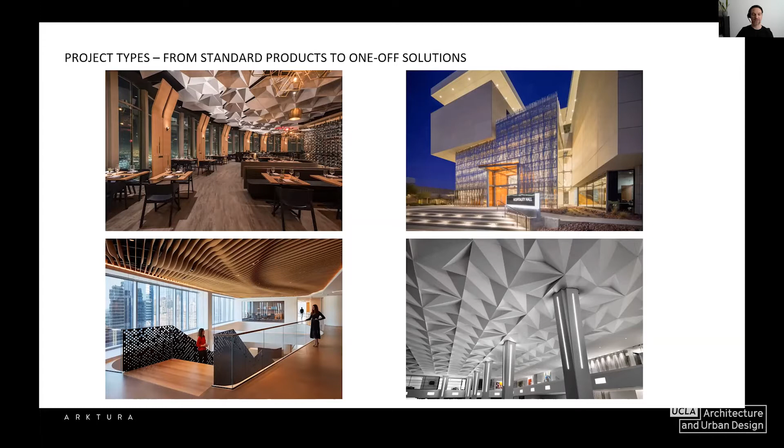So the way we approach designing and manufacturing is really as we think of ourselves as not just fabricators, but actually collaborators. So what we want to do is get involved with an architect, even at the earliest stages of what they envision for a project, and bring it as close to a manufacturable product with our manufacturing knowledge and capabilities as soon as possible. So we're really trying to engage at this design concept stage and collaborate all the way through the creative process,

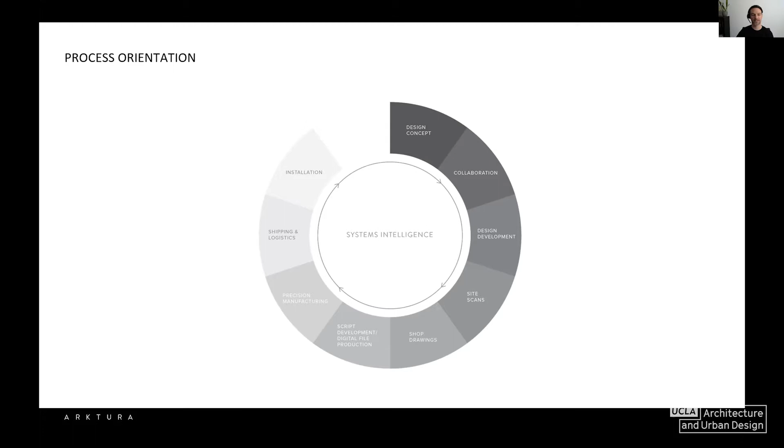through developing what's happening in a job site, software we might need to write, and all the way through to manufacturing and installation, and being involved all the way through a process, and not just providing product at the tail end of a project. And so we kind of live by this model of collaboration. So we're the manufacturer. We're also the designer sometimes, depending on what kind of project we're working on, and really engaging with all of the stakeholders on a project so that we're bringing the maximum amount of manufacturing intelligence and design and automation to the table.

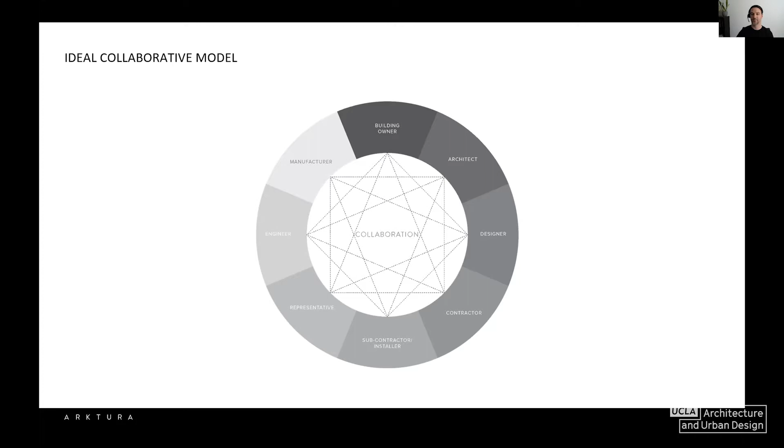And the way that we're doing that, we use this conceptually, our approach of the physical toolbox and the digital toolbox that we can call on. We use manufacturing automation of CNC and laser, robotics, and as well as software-based automation. So a lot of parametric software that architects are used to using, like Grasshopper, as well as a lot of custom software that we'll write for manufacturing automation.

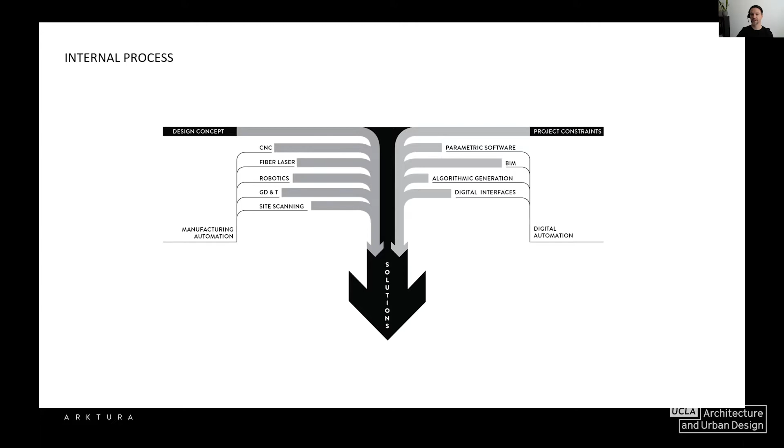So as an example, this is sort of a typical Grasshopper script that we would write. Some of you may be familiar with this, and for a lot of you, this will be something new, but this is how we're able to tell 3D modeling software to make automated pieces and parts for some of the products that we make.

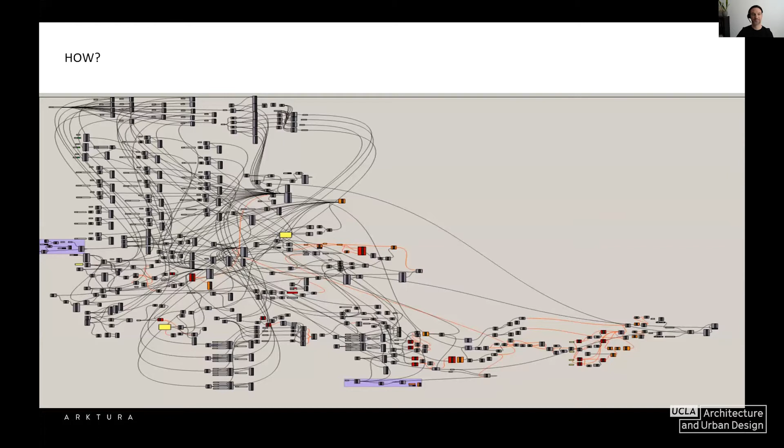And so I think the best way to understand our process is looking at our two major ways that Arktura operates in. We have a kit of parts model, which we call our architectural systems. And then we have the fully custom, sky's the limit design studio, which we call our Solutions Studio. And depending on which one of those paths we choose is how we approach the project.

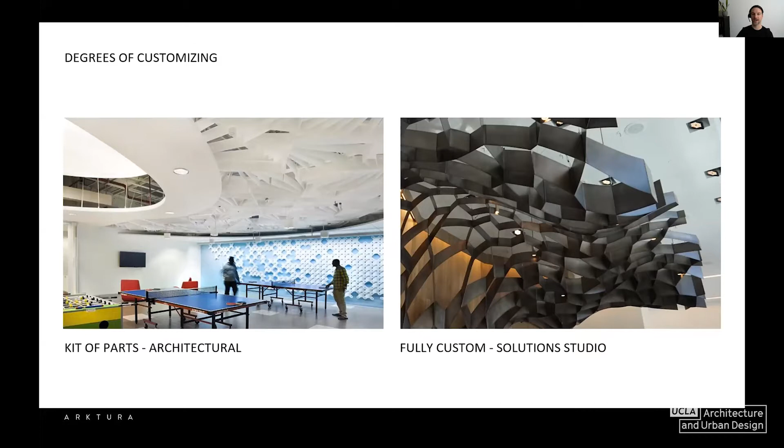So for example, in this kit of parts, what we're really trying to get to is something that's very adaptable. And by designing a kit of parts, we're able to apply it to many different spaces and keep costs down, and really help develop something that is flexible and can be applied to many different types of architecture, and allow for unique solutions without having to start from scratch every time. So really designing flexibility using parametric software and smart design of parts.

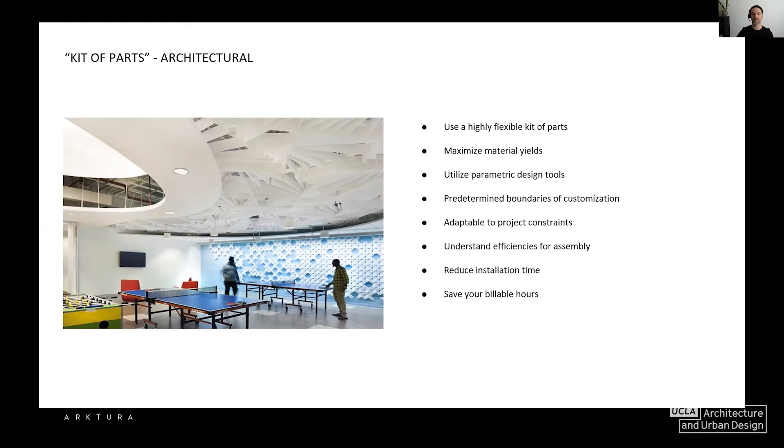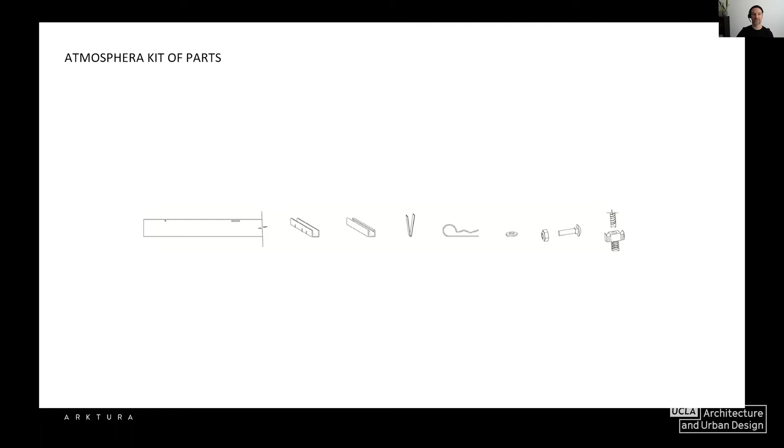So here, for example, there's this Atmosphera ceiling. It's a kind of a waveform, and you'll see some others here, but they all rely on the same base components. And then the software that we've designed allows us to make unique versions of each. So for example, there's a simple single fin, some channels, and a few pieces of hardware that is really all that goes into a system like this, but you get very elaborate outcomes by using algorithms and software that we've written to vary each component slightly, and then leveraging our digital manufacturing tools to fabricate each piece uniquely.

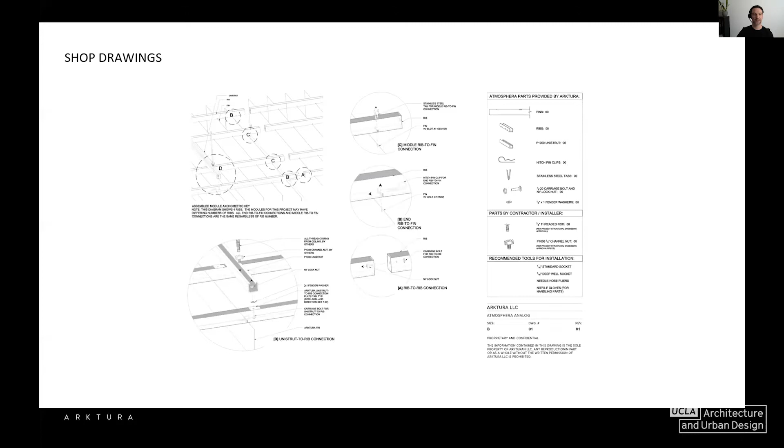So here you can see it's a very simple kit of parts. It's a couple ribs and some fins that cross it and some very simple hardware to attach them together. And by keeping this system really simple and allowing the software to create the variation and allow us to customize things, we're able to make really dynamic, unique installations for each project that don't cost a lot, don't take a lot of time to design, and are very unique and designed to each project to be a bespoke solution.

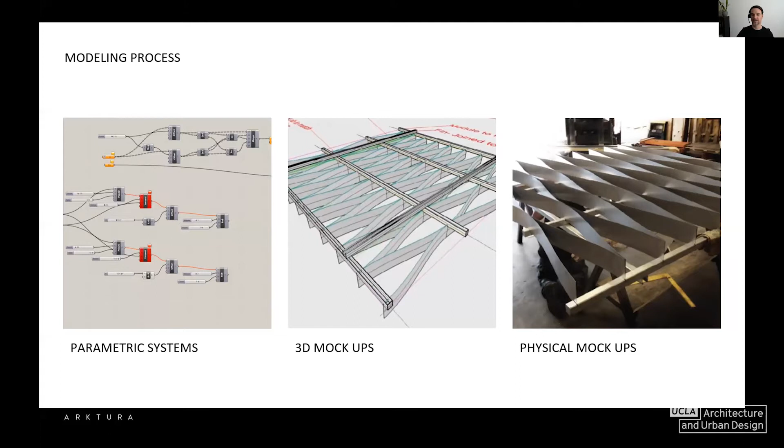So again, more of this parametric software that allows us to design in 3D and evaluate different designs and solutions, and then also manufacture and review physical mock-ups of each version that we fabricate. So for example, in plan view, if this is a very simple version of that Atmosphera system with very simple basic inputs, you can manipulate the forms to make them curve as a design choice. You can also accommodate pretty common architectural challenges like avoiding a column or integrating lighting and systems into essentially the same system with very few additional inputs, and still leveraging the same manufacturing techniques.

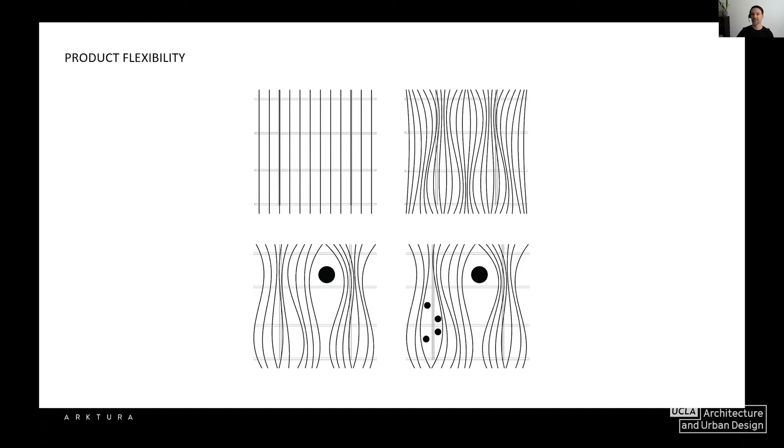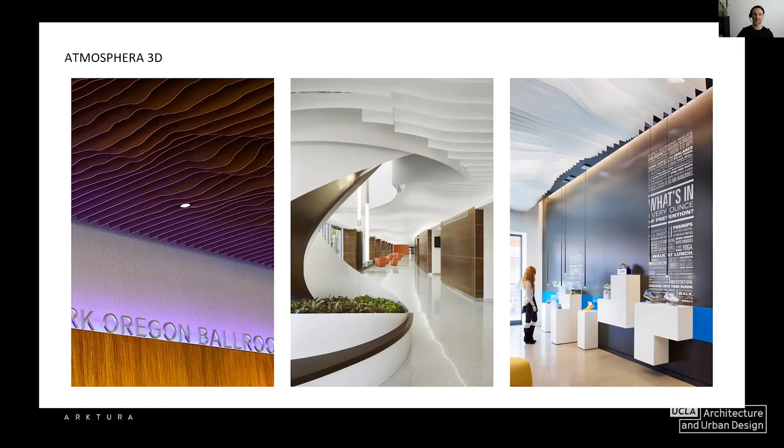So for example, these are 3 different versions of the same system. This was the Oregon Ballroom up in Oregon that we just completed. It's actually made with a PET felted plastic fin, what we call a soft sound. And each profile is unique, and the sum total of these make a topographical map. Here's another version that snakes through this lobby and this hallway and also undulates across to make a surface, and then a similar one that curves both in plan and also in section. And so with just that base system, we can create quite a large variety of different system types. So quite a lot of variation by leveraging a smart system and parametric software tools.

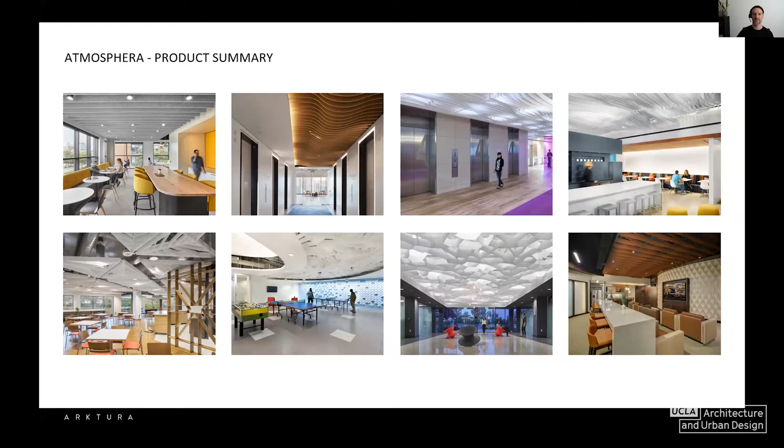So the other path and the other defining category of projects that Arktura works in is what we call our Solutions Studio. And these are really what I would call our flagship projects. These are the one of a kind, standout feature pieces in a space that are really meant to be the focal point of the project. So everything from facades to ceilings, walls, custom art installation and lighting, even some custom furnishings sometimes. So we run quite a broad range. So I'll run through a few right here.

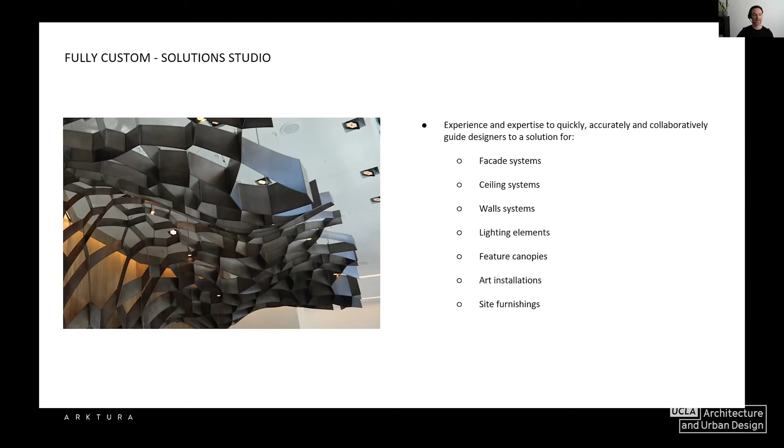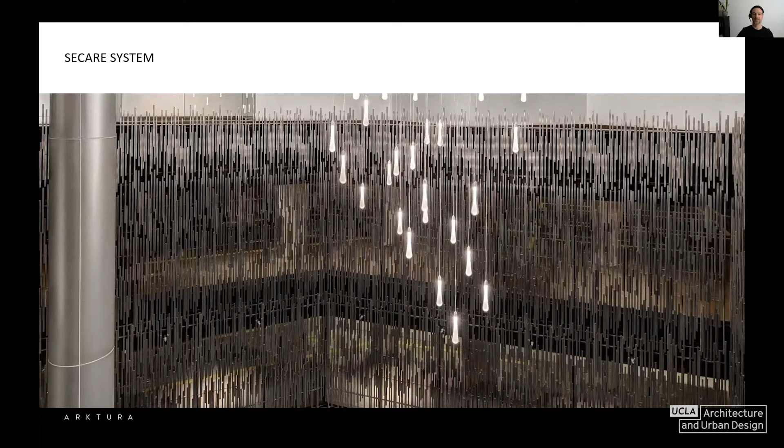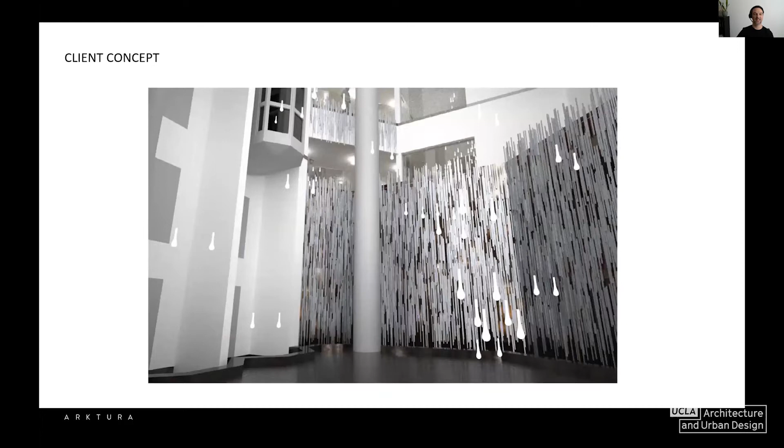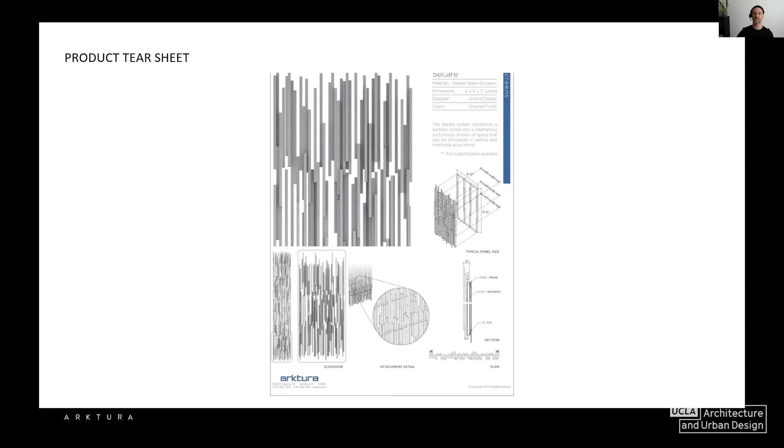So leveraging tools like laser site scanning, actually going out and measuring the entire space using laser scanning tools and generating a 3D model from that, we can then design the system to fit essentially perfectly without having to go and do additional measurements and wait for collaboration between us and contractors and other stakeholders to get the right dimensions to design the product.

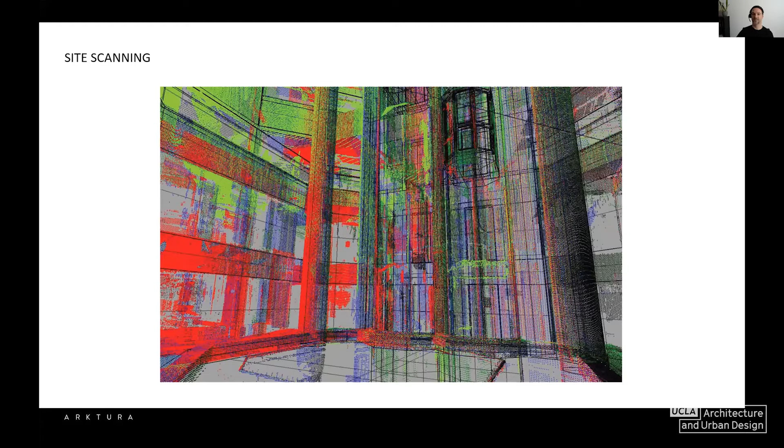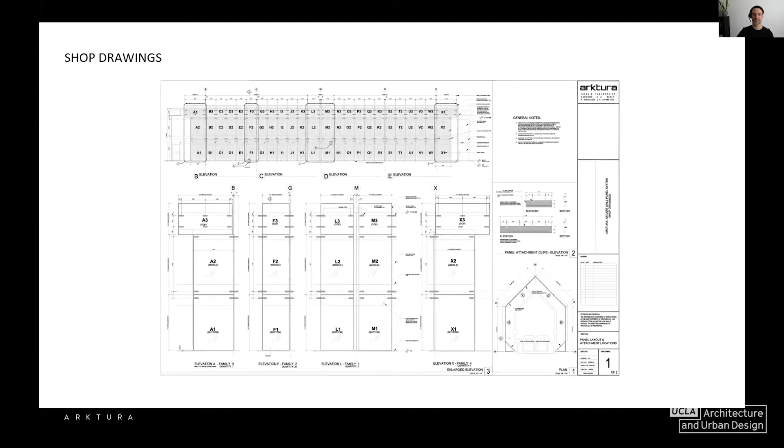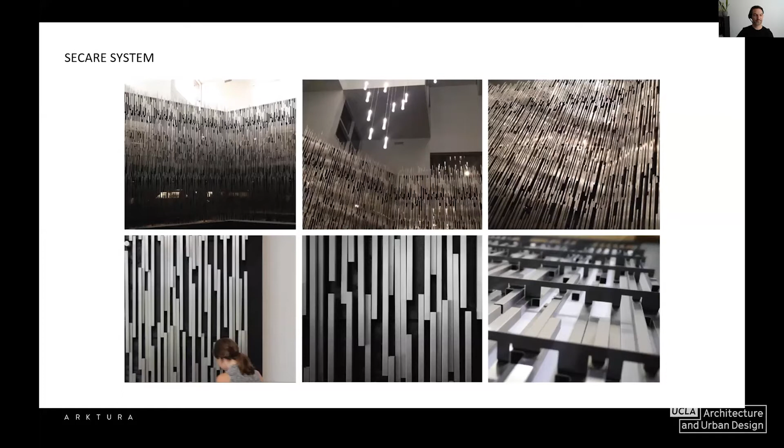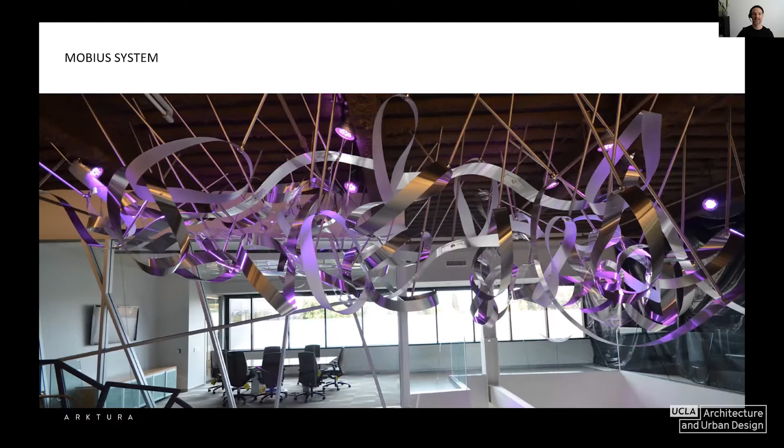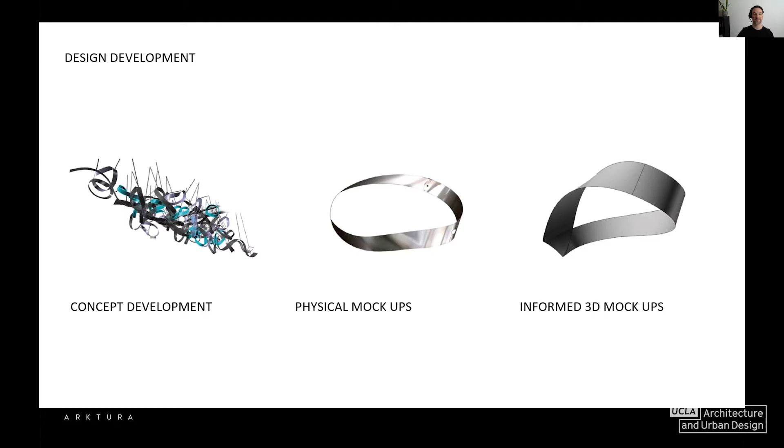And so from there, we're making concept renderings, physical mock-ups, and 3D model mock-ups that we can then interface with our client, the architect, the owner, and everyone who needs to see what this might actually look like. Drawings again to show placement and technique.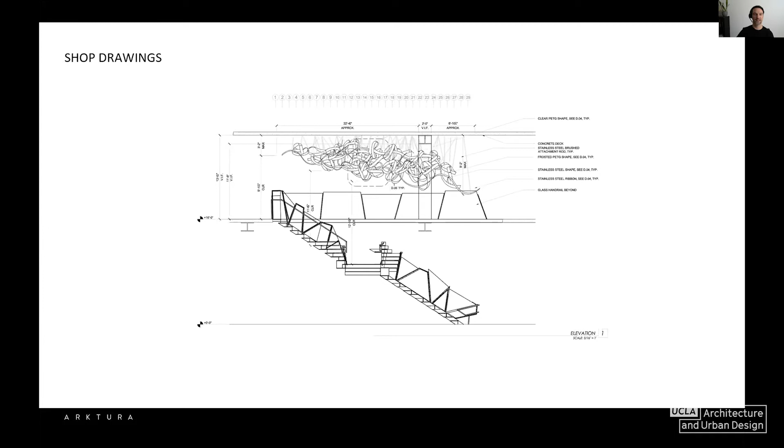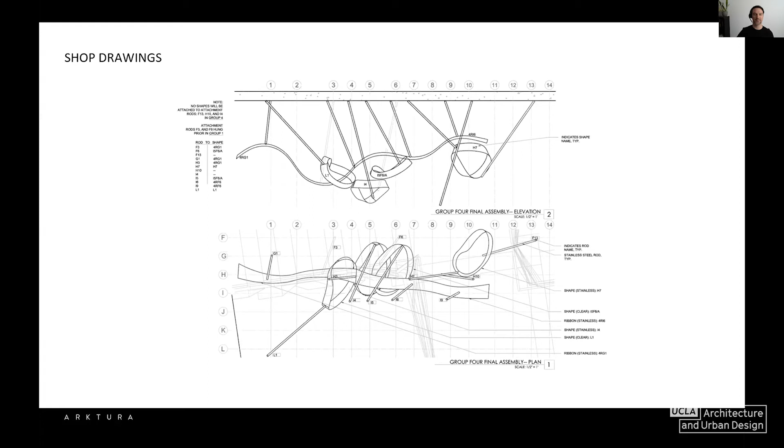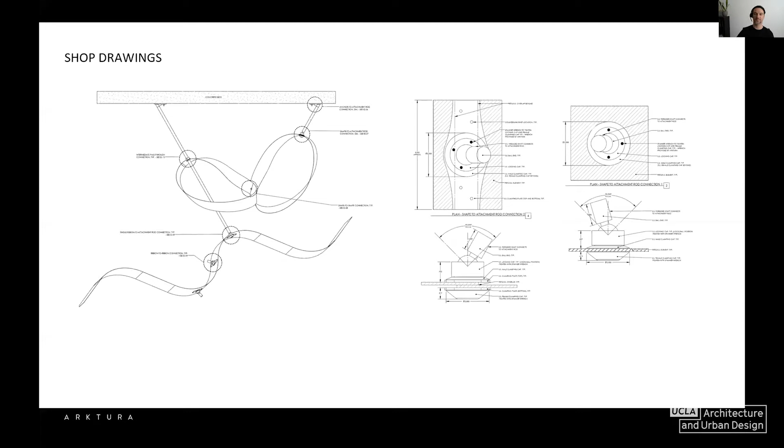This one is unique where not only did the Mobius strips need to be designed, but also the suspension system. And so we ended up designing and manufacturing our own hardware. So all of these ball and socket joints to make all these crazy angles and allow a little flexibility in where each one of these ribbons lands in space.

So you can see here, actually machining our own hardware from scratch, from raw stainless steel bars, to make joints and things for something that is otherwise probably unbuildable. So this way we can leverage digital manufacturing technology to facilitate otherwise unmakeable products.

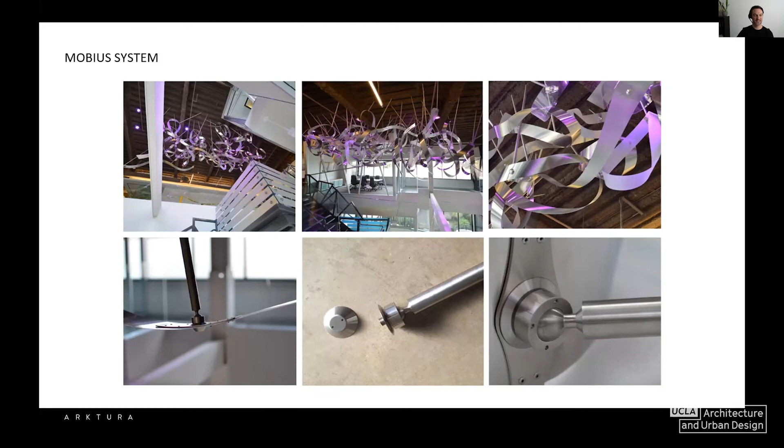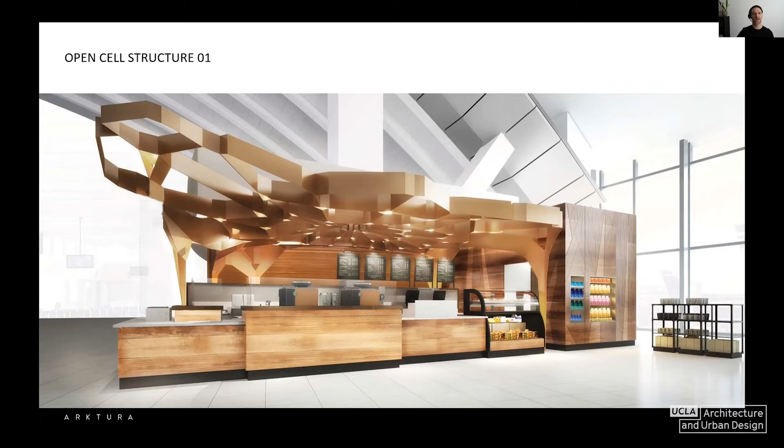So this is going to be a series of three different projects, all based on this cellular structure. So this is a Starbucks inside LAX International Terminal. You may have seen it. Essentially, this was a concept based on latte art.

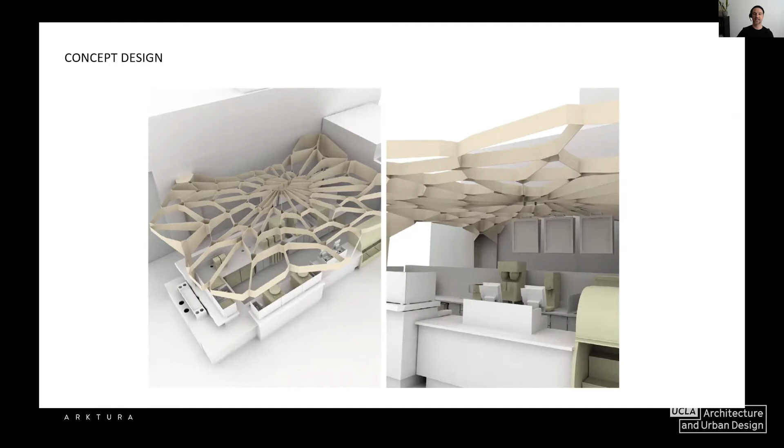And so taking that concept and figuring out how to make something that can actually be manufactured was a really interesting challenge. So how do you design each piece? How do you figure out how to join them together? How do you get something like this into LAX? And so leveraging, again, software-driven solutions to design each piece.

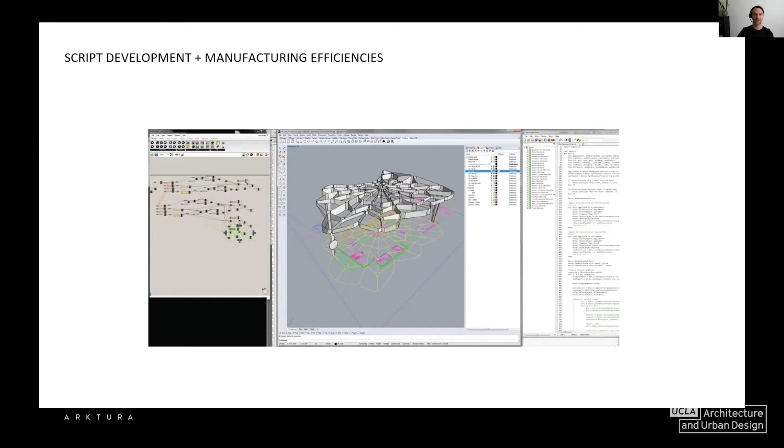Each piece is unique, and so each piece has to be individually labeled and manufactured. And so really trying to use what the software can create for us to automate that process, because if we were trying to do this manually, it would be nearly impossible and far too expensive.

So for example, the drawings we create for this product also serve as a guide for how to assemble and install it for the contractor who's going to put this in. So each piece is labeled, with a diagram of where to start, how to join each cell to its neighbor, and where you're going to build that in as you go assembling it.

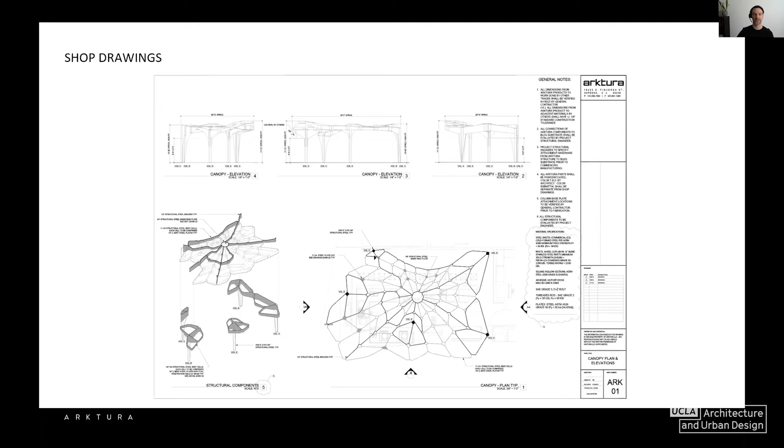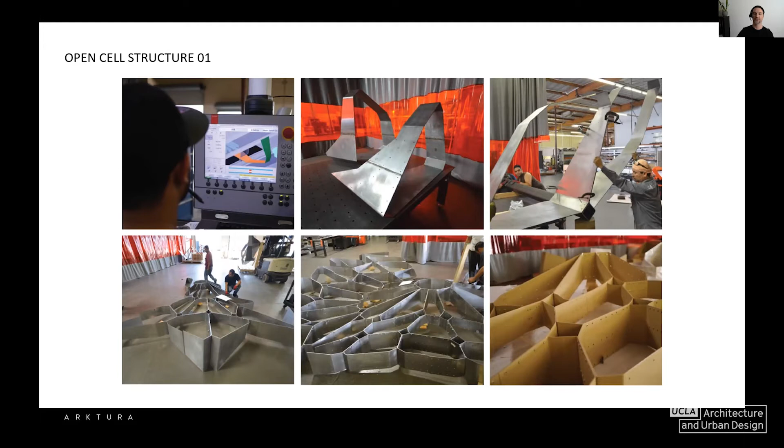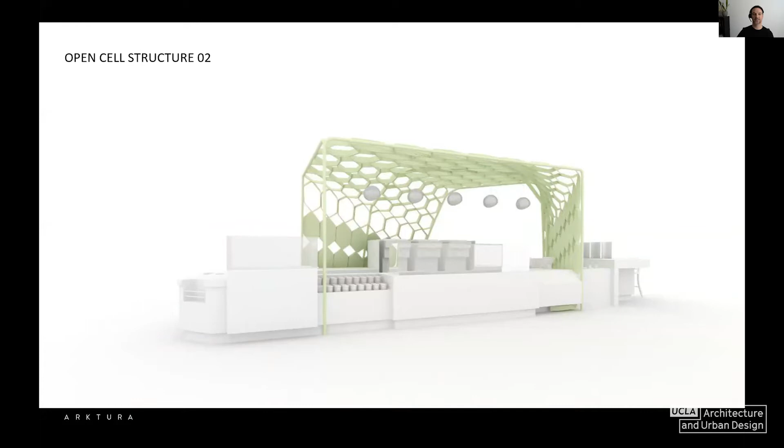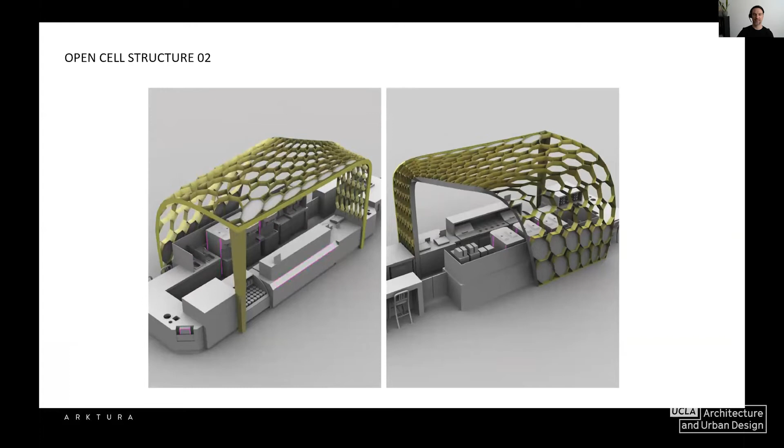And so another version of this, sort of an iteration on this, is a couple of concourses down from that: Pinkberry. It's basing off the same concept, but a little more of a rigidized version is this cellular canopy, but it's constrained within this wrapper of the edge of the material. Again, really leveraging the 3D tools.

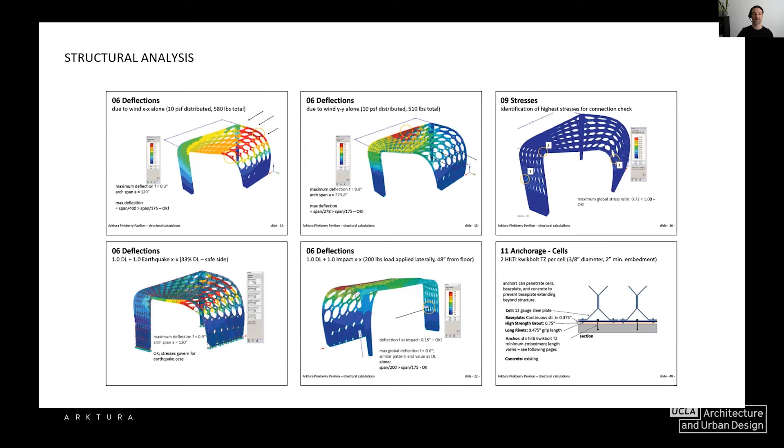Also, you can't really use span tables to calculate the stress and strain on something like this. So using finite element analysis software to actually size and design not only the size of the cells, but the thickness of the materials, how far apart they can be spaced, where they need to be supported. All of that can be accomplished using software like this.

Keith, it'd be great to wrap up soon. Sorry. Okay. And then, let's see, we'll fast forward.

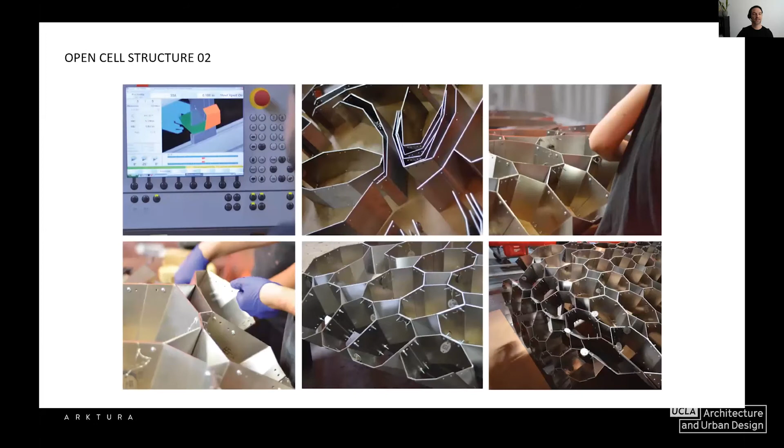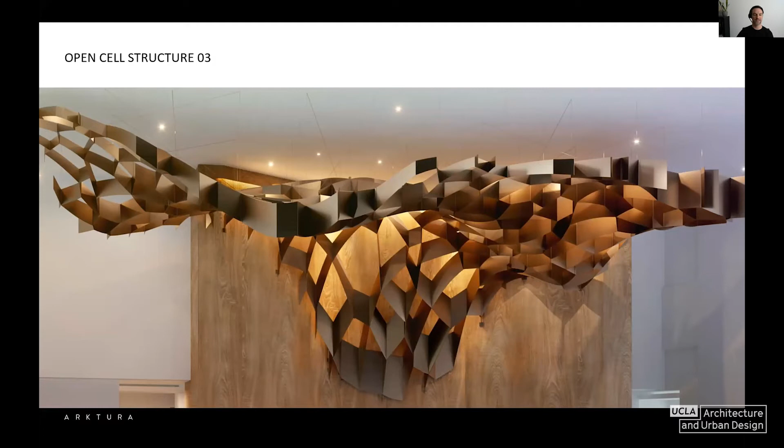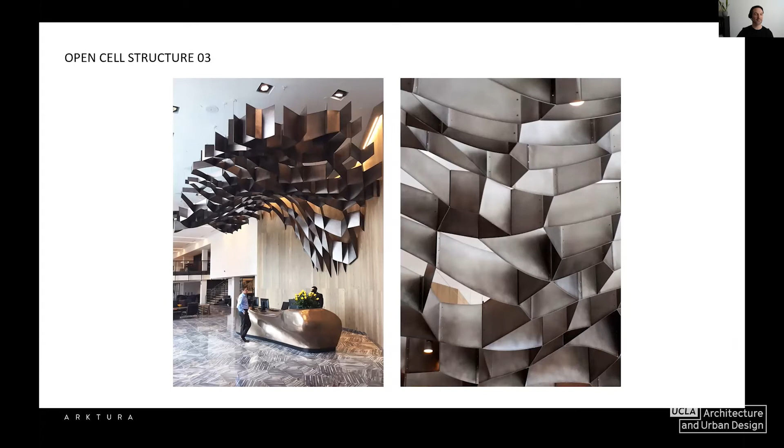So, last version of this same kind of concept. This was a fairly recent one that's a lobby feature, but again, leveraging the same tools to make something that's a little more dynamic and more of a hanging sculpture than an actual canopy, but all based around the same thing. Okay, we can end there.

I'll turn it over. Great, thank you so much. Erin, if you're ready. Hello. Okay, let me see if I can get my screen shared.

I'm going to keep this fairly short and sweet since I am working under a pretty strict NDA. So unfortunately, I can't share any of the most fun things with you guys, but please ask me all the questions you can. In all seriousness, I just got authorized to use renders this past week, and that took reaching out to the project architect and construction manager directly.

Let me get this closed. Share screen. And view.

Full screen mode. All right, so my name is Erin Dei. I'm a pretty recent UCLA graduate. I graduated 2 years ago from the 3-year program, and 2 weeks after graduation, stepped on with Kreysler and Associates. Just as a brief introduction, the company I work for works with architectural composites as well as commercial and artistic applications.

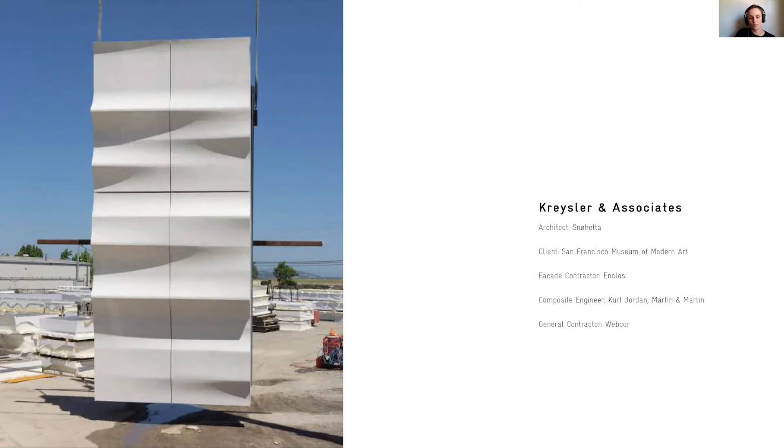We're currently working on the Lucas Museum, but I'm going to introduce you to the company, the company process and composites in general, just to contextualize what I'm talking about, as it might be new to a lot of the students who are watching. One of our most notable projects before our current project was the SF MoMA project. As you can see, the rippling patterns from Snøhetta, we were able to make these molds using a CNC hot wire cutter, basically using Grasshopper to program the hot wire cutter in specified paths.

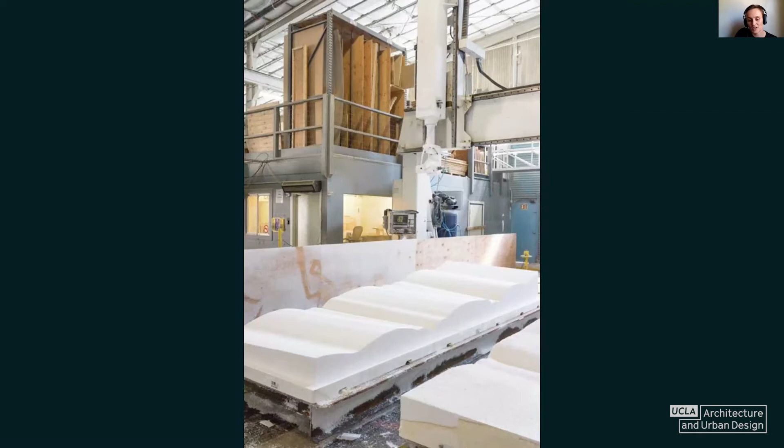Going into what composites are. Composites are something that you probably take for granted in your life. It's going to be carbon fiber or fiberglass resin, so anything from chairs you're sitting on to cars and other vehicles. How we do it at Kreysler is we start off, in most applications, milling foam. This is a picture from our Green Island facility.

We have 2 facilities in the Bay Area. One is at Green Island and the other is at Mare Island, which is an old military base. I'm currently working in the Mare Island facility, but again, due to NDA, I can't show any pictures of it. So here you can see a very large CNC machine originally used for nautical applications that is milling the foam mold for one of our projects.

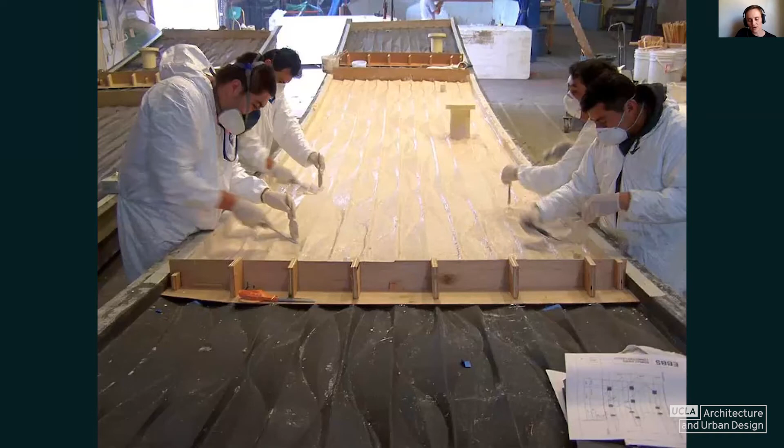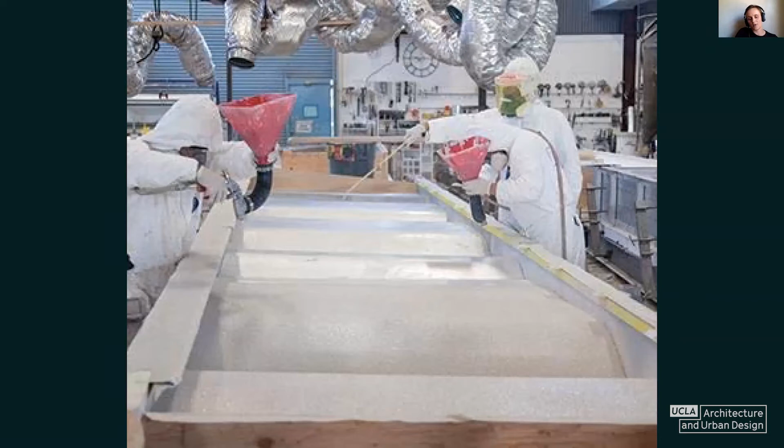We then go to prepping the mold and applying a mold release, so we can take our fiberboard or foam substrate and apply a mold release that will allow us to take the fiberglass off. Basically, we have the fiberglass that's impregnated with a resin, and that is layered to create a rigid surface that is about 5 pounds per square foot. So it's for extremely lightweight applications.

I would like to emphasize that while we do work in a highly digitally motivated process, for every 2 programmers, there's probably about 40 craftsmen working in the shop. This is Miguel impregnating the carbon fiber with resin.

I'd like to highlight him in particular because he's been with the company for almost 35 years now. And as a programmer and somebody interested in digital processes, I always like to walk the floor and look to people who are doing these processes by hand for inspiration in regards to how to approach complex problems.

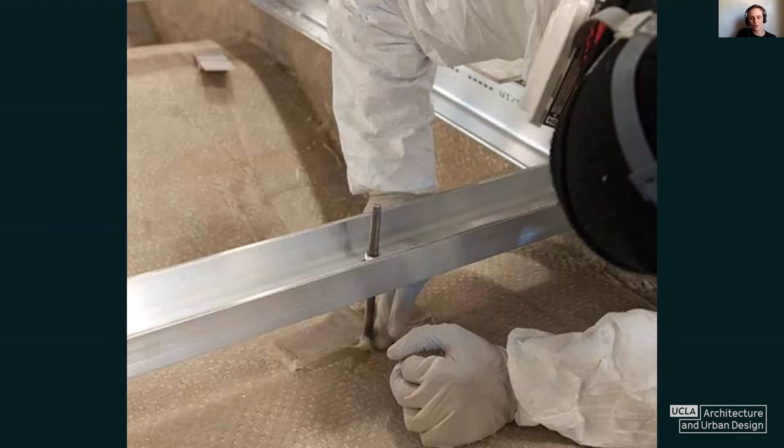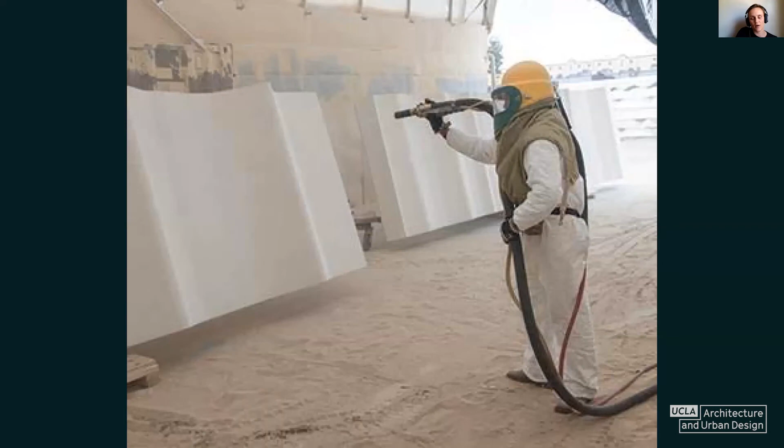We can see here that the fiberglass is being embedded to hold onto a frame. Otherwise it would be a sort of floppy or semi-rigid facade; this gives it structure and then allows it to hang on the building. This project for SF MoMA was given a finish using a sandblaster, which provides a nice uniform finish.

Our current project is a little bit more complicated because we're doing a cut finish, and unfortunately I can't share any images of the finish or the process, but that's what has been occupying most of my time and providing most of the challenges in regards to robotic fabrication.

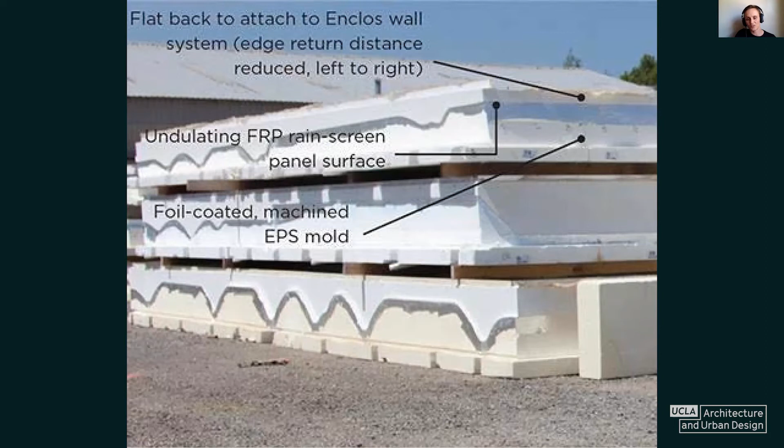Another thing I'd like to plug about Kreysler is basically the ingenuity in regards to all stages of production, including shipping. The SF MoMA facades were shipped in their own mold to site, where they were then hung in place.

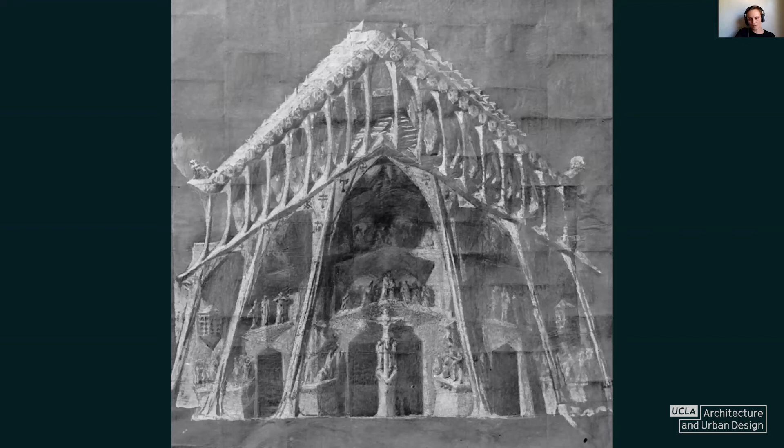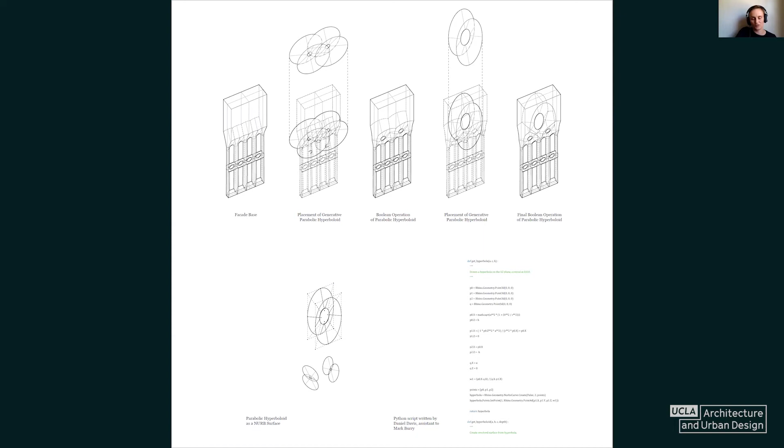Here's a few quick slides about the Sagrada Familia project. It's a project by Gaudi. Mark Burry, who is one of the programmers on site, was basically able to finish the 100-year project by using robotics in order to execute some of these more difficult doubly curved forms, and he had programmed several of the details that Gaudi was able to only sculpt by hand.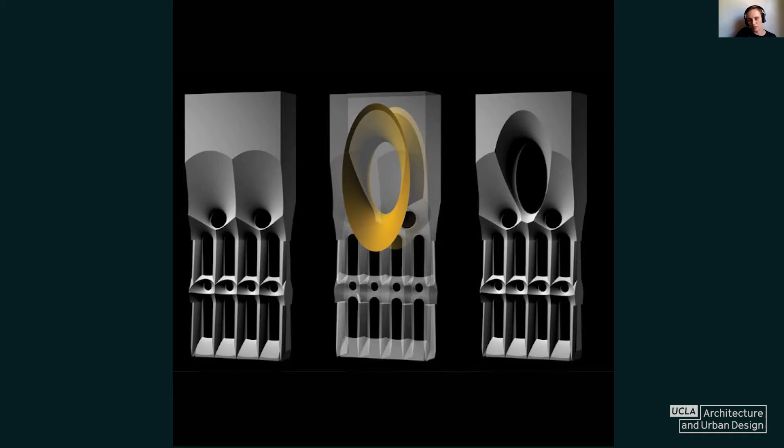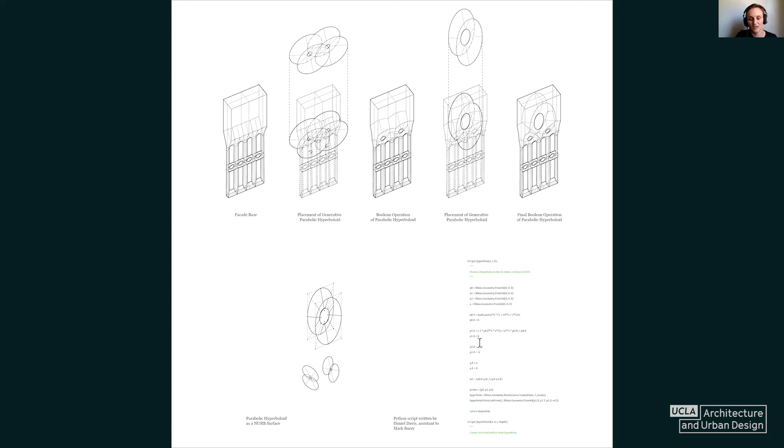Here's a few slides of some of the research there, where we were looking at case studies into the forms as well as the scripting used to generate them. This is a great example of a project that could only be accomplished by computer-aided design.

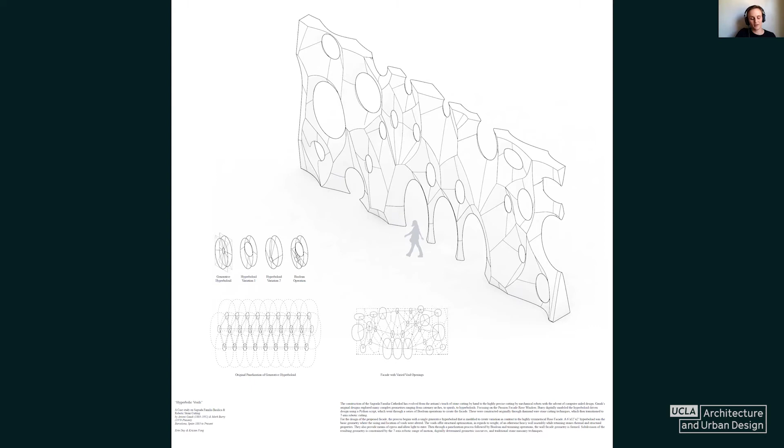So again, I'd like to apologize for the lack of images and not having too much of a presentation put together just because I'm under a very tight NDA, but I would like to present what I think has been some of the more interesting projects that I've gotten to work on in my time post-graduation.

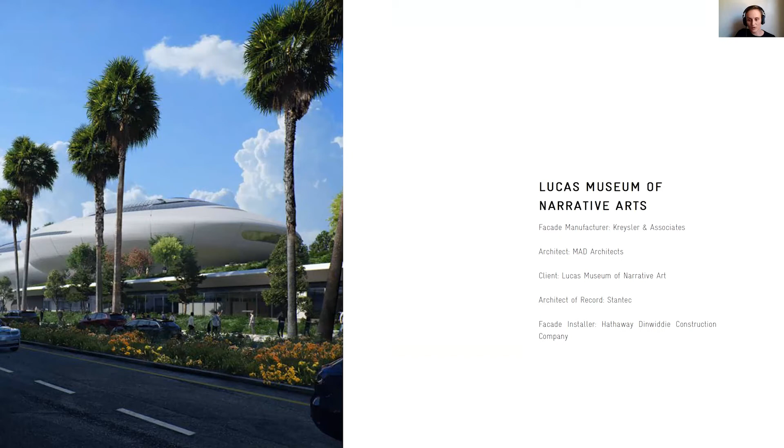This is the Lucas Museum of Narrative Arts. I'm working for Kreysler and Associates, and we're doing the facade of the building. The architect is MAD, and our client is the Lucas Museum of Narrative Art. We're also working with several subcontractors. So I'll introduce a couple renders.

As you can see, there are nearly 1,500 unique facade panels, ranging anywhere from about 12 feet to a little over 40 feet. One of the challenges working on this project has simply been the sheer number of unique components that we have. With my role in particular, I am providing the finish as well as the surface cuts on the panels.

We're working with extremely tight tolerances, and that's been one of the greatest challenges, not only the unique facade panels, but also the tolerances, which are on average per panel about 1/16 of an inch for any of the cuts to the panel bottoms, sides, or face. You can kind of see how the panelization strategy is working here. And we have about a 7/8 inch reveal on all of the facades.

So getting these panels to fit tightly and precisely has put a lot of burden on robotics in particular, as well as calculating things like shrinkage and warpage on the initial CNC manufacturing end. So I'll walk you through a couple of the aerial slides.

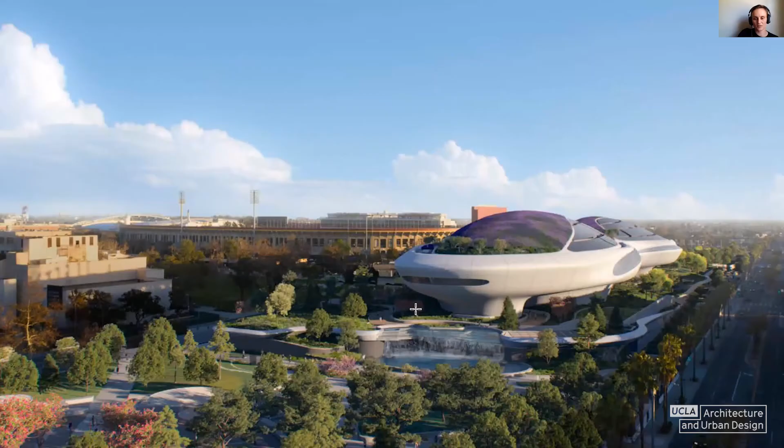So you can see, this project is going to be in South LA. It's currently under construction and it has an anticipated opening date of 2022. So please go and see it when it's open. And a couple more renders.

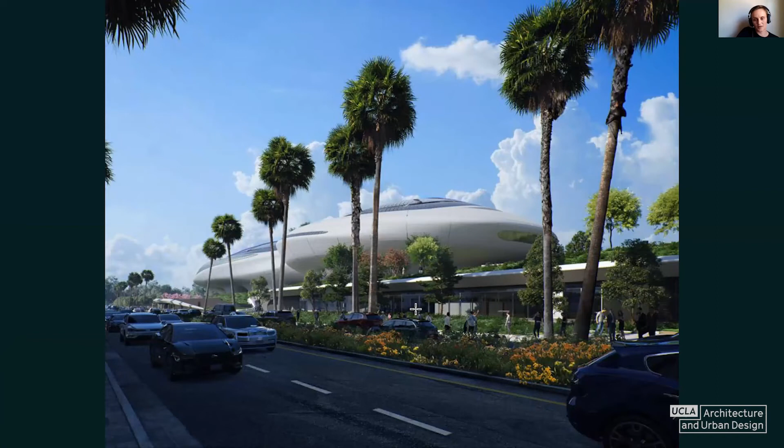Yeah, again, it's extremely difficult for me to share images, but a lot of my day-to-day work does involve Rhino and Grasshopper, as Keith had mentioned he uses pretty heavily before. One of my current challenges that I've been working on the past couple weeks is looking at robotic kinematics and optimization, and the challenge of pre-planning when we have so many different panels that we bring into production on a day-to-day basis.

So basically, when we bring objects into the cell, we utilize tools that were not really made for architecture, such as industrial robotics, 3D scanners typically used for surveys, as well as PowerMill and other robotic control software that are really meant for more repetitive production in a production facility, rather than dealing with such a high volume of atypical and large pieces. So I've been pretty heavily digging into a lot of skills that I've learned as an architect in a non-architectural environment.

So I think I might end it here, but please ask some more questions about this. Again, it's really difficult for me to present on this, but I'm happy to answer any questions that might come up.